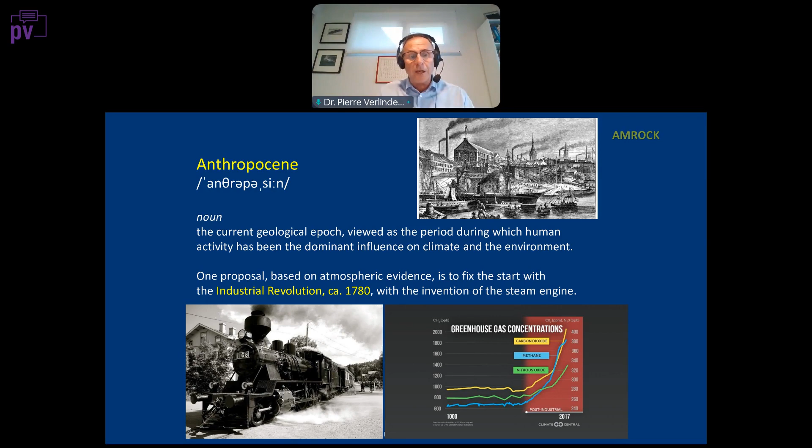And let's put things in context. Right now, we are in the geological epoch that we call the Anthropocene. It means that it's a period during which human activity has been dominant in influencing climate and the environment. People put the beginning of the Anthropocene at the beginning of the Industrial Revolution, around 1780, when the steam engine was invented. Of course, this is just an idea. It's not been officially recognized, it's not an official name for the current epoch, but that's what we call it right now, because we realize that human beings have a strong influence on the climate.

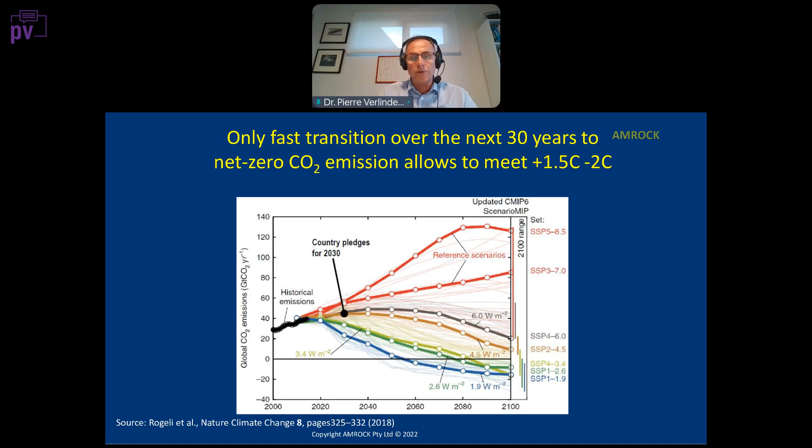So a lot of people have done simulations of what we should do and how fast we need to reduce CO2 emissions. And as you can see in those different simulations with different colors, only the blue one is capable of maintaining the temperature excursion to about 1.5 to 2 degrees C. That means that by roughly 2050 to 2055, we need to reduce to zero CO2 emissions. And after that, we need to remove CO2 from the atmosphere. So it's a big task.

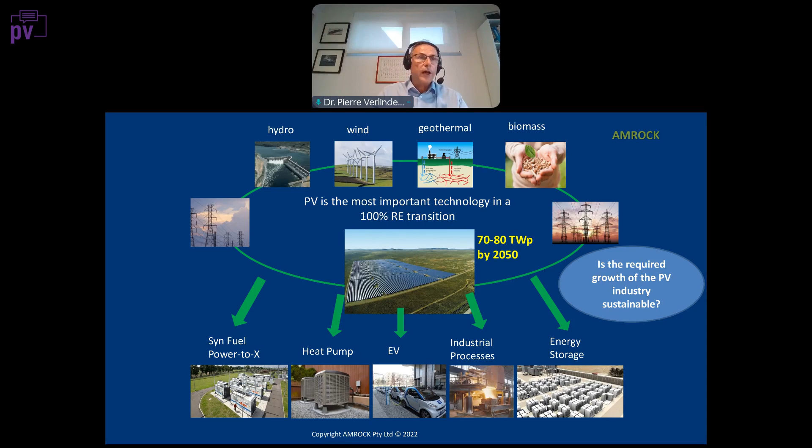So our vision is that the world needs to be 100% renewable, and PV plays a very, very important role. It's probably the largest source of electricity in the future. And to do this, we need to install something like 70 or 80 terawatts by 2050. Of course, with wind, hydro, geothermal, biomass, all of that being linked and interconnected, we will power the entire economy, including industry, transportation, heating and cooling of buildings, and generation of synthetic fuels to power the rest of the economy, including industry that requires hydrogen, for example, to make steel or aluminum.

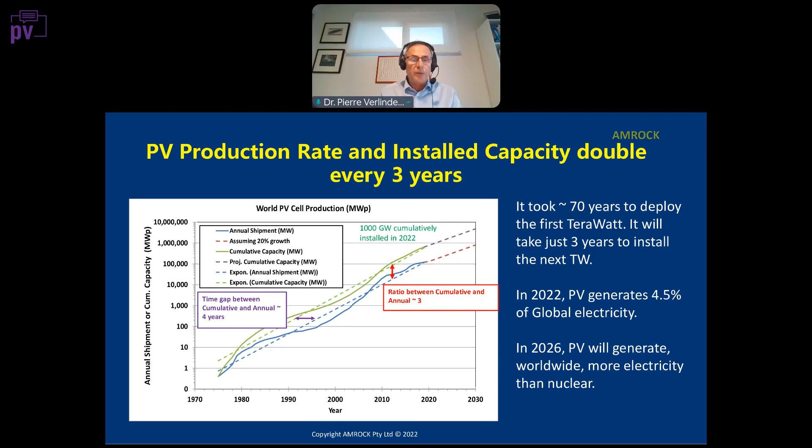Now, if we look at the PV production rate and installed capacity over the last 70 years, what we see is that the capacity and production rate have doubled every 3 years. It took 70 years to deploy the first terawatt, and it will just take 3 years to install the next one. In 2022, PV generates about 4.5% of global electricity. In 2026, PV will generate worldwide more electricity than nuclear energy.

And then we need to stabilize production at roughly 3 to 3.5 terawatts annually. This will allow the cumulative deployment to grow to about 70 or 80 terawatts by mid-century without creating a downturn, because at some point, of course, the deployment will saturate and the industry will start replacing modules that were installed 25 or 30 years previously. So we need to stabilize production about 25 to 30 years before it saturates, so before mid-century.

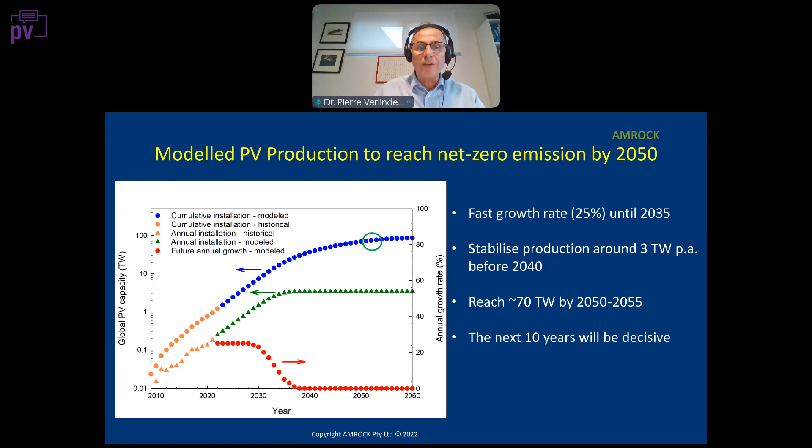So when we talk about sustainability, there are different ways to look at it. First, we could look at energy: how many kilowatt hours are consumed per kilowatt peak installed, including manufacturing, transportation, and installation. What's the energy payback time? How fast can we grow this industry to make sure we don't consume more energy than we generate?

We could also look at CO2 emissions. What's the amount of CO2 embedded in the modules and how much is it per kilowatt hour? We could look at water and chemical consumption, and also at solid waste, gas and liquid effluents, the pollution we create.

We could look at material usage. Are they available? What's the scarcity of this material? Is there a risk of price increase, speculation? How is the supply chain? Do we need to recycle or capture valuable material? And also, what is the financial sustainability of the industry? Can we generate enough earning to grow, to build a new production line?

There are different factors that will impact sustainability. Reliability, of course. If the module lasts 1 year, we need to produce a lot more modules than if they last 30 years. So it's very important that we increase the lifetime of modules and PV systems in general. Efficiency, performance ratio, annual irradiance, orientation, partial shading—all of those factors impact the amount of kilowatt hours per kilowatt installed.

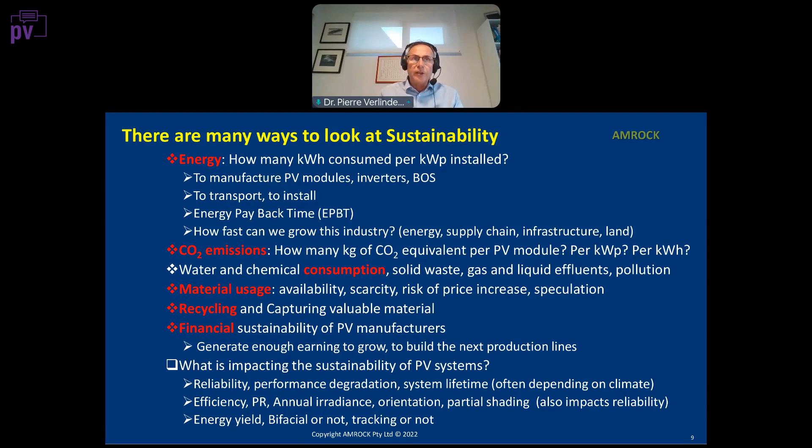And of course that impacts the sustainability of the industry. Energy yield—do we use bifacial modules or not? Do we use tracking or no tracking? All of that will impact the energy yield and the sustainability.

After 25, 30 years, hopefully maybe 40 or 50 years in the future, the system is decommissioned and recycled. Each of those steps requires materials and energy and will create effluents. At some point, recycling will generate material that could be sent back into the chain.

So what's the energy payback time? Well, it's the total amount of energy, of primary energy demand during the whole lifetime cycle, divided by the energy generated by the system, minus the energy consumed by operation and maintenance.

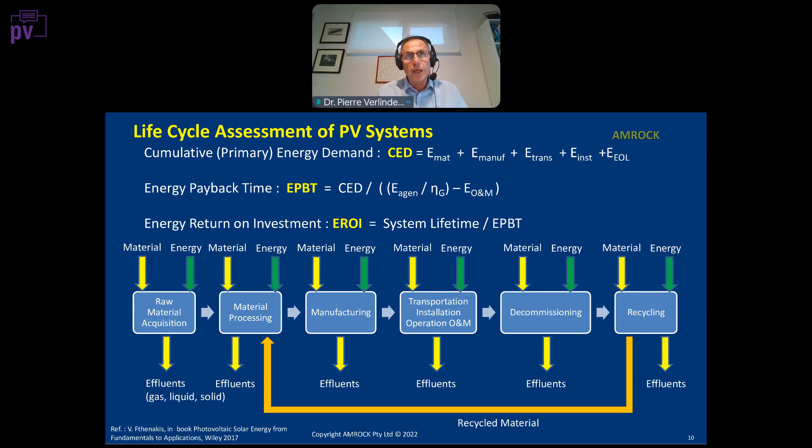You could compare that with other methods of generating electricity—for example, coal, which has more than 1,000 grams per kilowatt hour, or gas, which has roughly about 760 grams of CO2 per kilowatt hour, or nuclear, which has roughly about 24 grams of CO2 per kilowatt hour.

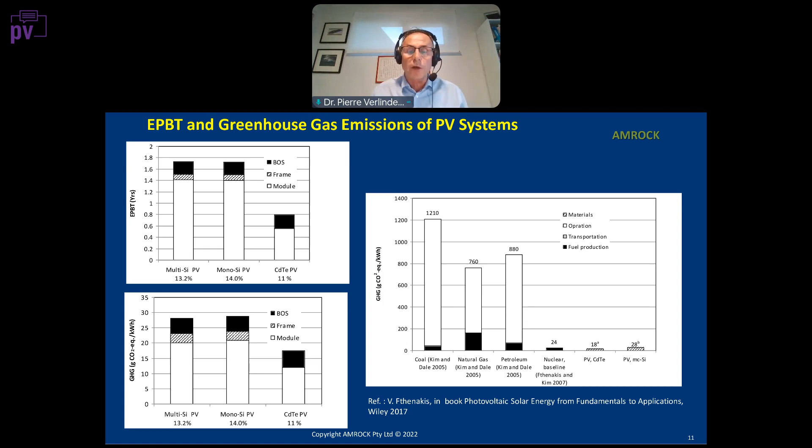You see renewable energy is growing because we're improving the lifetime, the reliability, and reducing the energy consumed to produce it. Whereas other technologies like oil, the return on investment is reduced because as we deplete the resource, it's more difficult to get the next barrel.

We have to spend more and more energy to extract oil. Now, how fast can we grow? Basically, the maximum growth rate is smaller than 1 over the energy payback time. So if it takes 1 year to pay back the energy consumed, you could grow at 100%. If it takes 2 years, you could grow at 50%. If it takes 3 years, you could grow at 30%. So the energy payback time is important to decide how fast we can grow the industry sustainably.

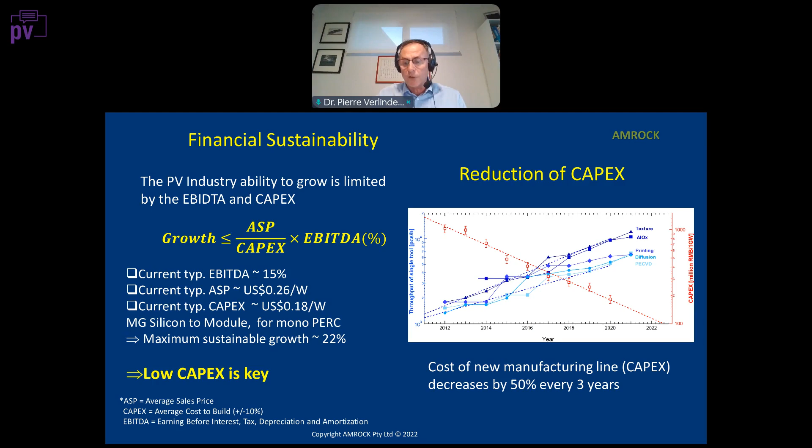So when we buy a 400 watt PV panel that costs about $100, it will produce exactly the same amount of electricity as 6.9 tons of coal, which costs about $280 US. That directly shows the potential sustainability of the PV industry.

This is represented by the graph on the left, showing that 1 terawatt of PV system consumes about 3 times 10 to the 17 joules in primary energy demand. It will generate about 698 million tons of CO2, but in the same time it will save 25 billion tons of CO2, save 3.9 times 10 to the 20 joules in primary energy, and generate 32,500 terawatt hours over 25 years.

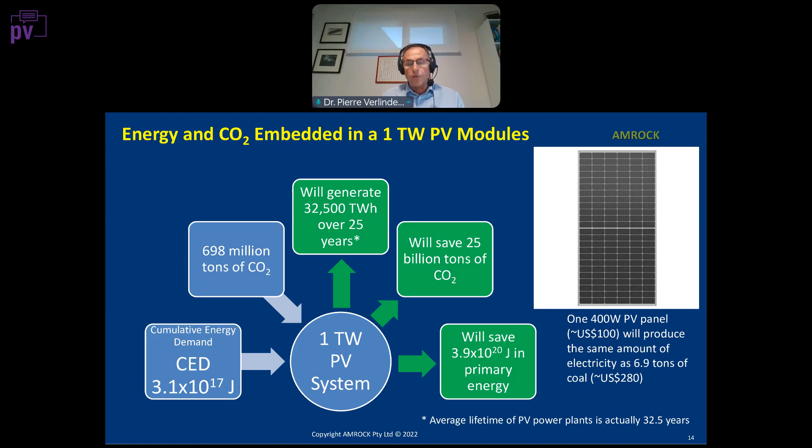So to give you an idea: yes, we do consume energy, yes, we do generate CO2, but we save a lot of CO2 and a lot of primary energy by operating PV panels and PV systems.

Now let's talk about material sustainability. On the right side of the slide, you see a graph of the cost of manufacturing versus cumulative production. It's pretty much a straight line in that logarithmic plot, representing what you've probably heard called the learning rate. The learning rate of silicon is roughly about 24%.

Now you see a bump there, roughly around 2010, when cumulative production was about 10 to the 4 megawatts. That bump is due to supply constraints—at that moment we were constrained in the supply of purified polysilicon, and that lasted a few years. So bumps on the learning curves are usually generated by supply constraints.

Supply constraints could be due to the inability of suppliers to grow as fast as the demand, as fast as the industry. For example, in 2005-2010, the polysilicon industry could not supply purified polysilicon as fast as the PV industry was growing. Recently we've also seen interruptions of supply due to fires and flooding—several polysilicon factories had fires, some flooding in China that interrupted the industry. We also had COVID, which prevented supply from reaching manufacturers. But those supply constraints that I mentioned are temporary.

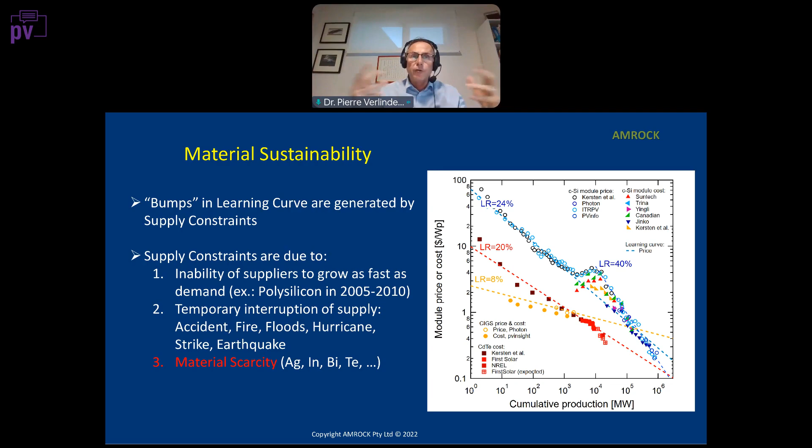They will be solved at some point. However, number 3, material scarcity is another problem. For example, materials like silver, indium, bismuth, tellurium, cadmium, etc., materials that are pretty rare compared to silicon, and we have to make sure that we have enough of those materials in the future when we reach the terawatt or multi-terawatt level.

The graph on the left side shows the materials that we should not use in photovoltaics. The ones below the blue line are 7 orders of magnitude less abundant compared to silicon, and those materials we should not use because at some point as we grow, they will not be available anymore. Those materials are silver, indium, palladium, gold, platinum, and also bismuth, cadmium, and tellurium. We should not use those materials.

This graph on the right-hand side, I showed in 2013 at the EU PV-SEC in Paris, showing a simulation of the impact of the PV industry. That's the blue line that becomes dominant about 2020. By 2020, we see that PV is actually growing the demand for silver. It's the fastest growing demand and usage for silver in the industry. The world production of silver is about 30,000 tons per year.

You'd say we could recycle, of course, but recycling does not become significant until 2050. If we recycle today, we recycle modules that have been installed 25 or 30 years ago, and the quantity of those modules is not sufficient to supply silver for the industry.

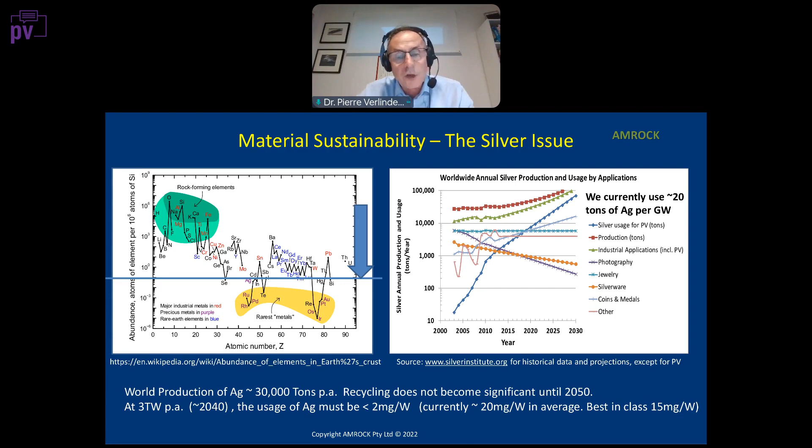So where is the silver? Well, the silver is, of course, in the contact, and we have different technologies to consider. PERC is the one that uses the least amount of silver. It uses silver on the front side to contact the N-type region. The back side uses aluminum for contacting, and there's a little bit of silver for the bonding pads.

The TOPCon technology uses an aluminum silver contact on the front and a pure silver contact at the back. So we have to expect TOPCon to use a lot more silver than PERC. Silicon heterojunction cells use silver contact on both sides, so again, they use more silver than TOPCon and more silver than PERC.

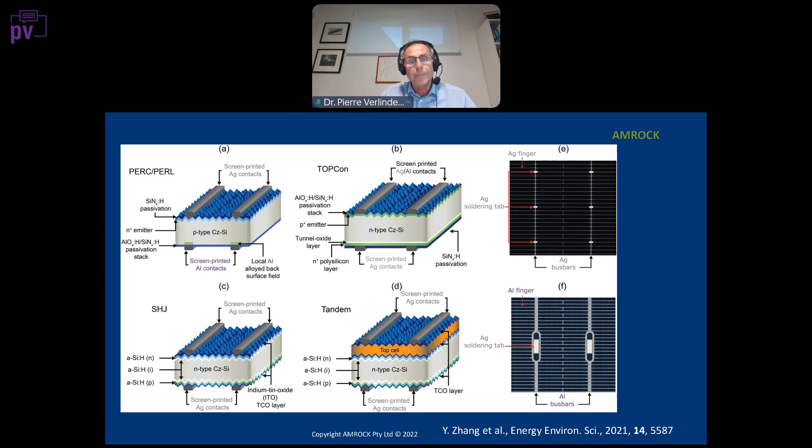And for future tandem cells, like perovskite on silicon, they also use pure silver contact on the front and the back. So on the table on the left-hand side, you see the consumption of silver for the different technologies. Best in class uses roughly about 15 milligrams per watt in PERC technology, for TOPCon about 25, and for heterojunction about 34 milligrams per watt.

At 1 terawatt production level, PERC technology would use 53% of the current global production of silver. TOPCon will use 88%, and HJT would use more than 100% of all the production of silver. So at 1 terawatt level per year, we need to reduce to 5 milligrams per watt; at 2 or 3 terawatt, we need to reduce to less than 2 milligrams per watt.

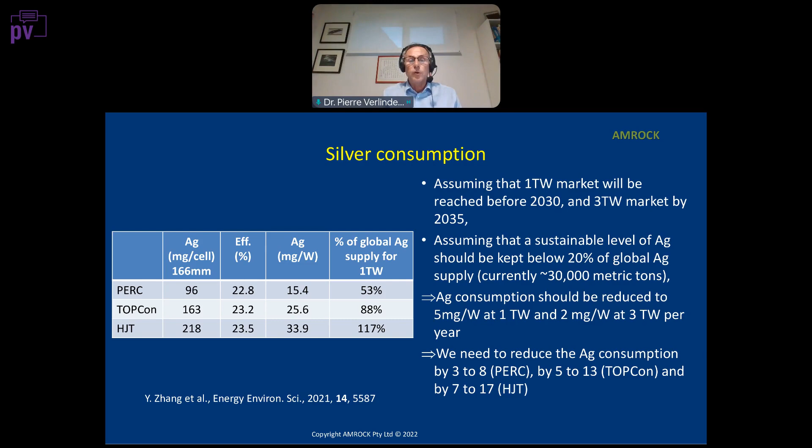Now, indium and bismuth are both used in heterojunction technology. Indium is used in the cells for the deposition of TCO, transparent conductive oxide, in a layer of indium tin oxide. Heterojunction uses roughly about 4 to 10 milligrams per watt of indium. So if we want to keep the consumption of indium less than 20% of the world supply, that means we cannot grow heterojunction to more than 37 or 95, less than 100 gigawatts.

So for the moment, we cannot grow heterojunction technology to more than 100 gigawatts per year.

Bismuth is used in the soldering of the contact, the ribbon and the wires to the cell, during module assembly. This is because we need low temperature solder, so we use a tin bismuth alloy. If we use a 12 bus bar technology, we use typically 7.8 milligrams per watt. If we use smart wire technology, we use 13 milligrams per watt.

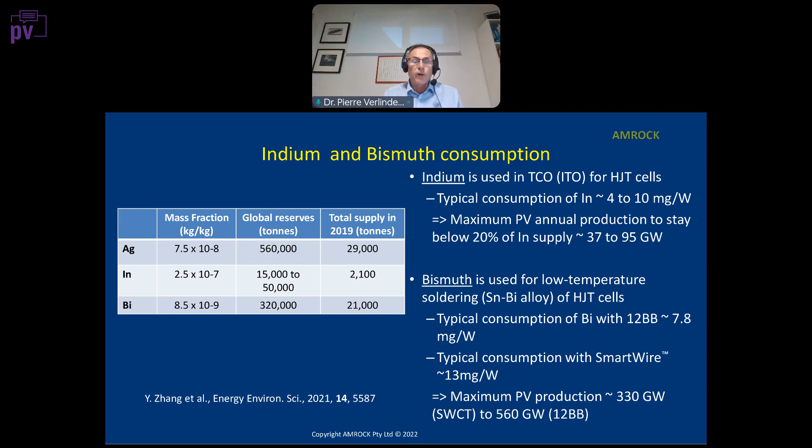So the maximum production in those technologies using bismuth, if we want to stay below 20% of the overall production of bismuth, means that we cannot grow this technology more than 560 gigawatts in the case of 12 bus bar, or 330 gigawatts in the case of smart wire technology.

So we use quite a bit of material, and the most important one right now is for PERC technology. If we suppose PERC at 1 terawatt level, we would use almost 90% of the worldwide production, so 29,000 tons of silver. Of course, there are other materials, like copper.

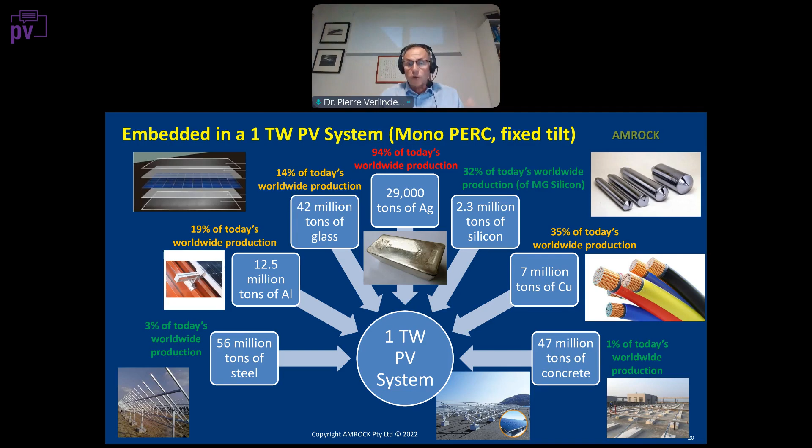Now let's talk about recycling. Of course we need recycling. Today we have roughly about 100 megawatts of modules to recycle. In 10 years, the volume will be about 10 times larger, about 150,000 tons of modules to recycle.

When the system is decommissioned, we remove the concrete, we recycle the metals, the steel, the aluminum frame, we recycle the cables, the connectors, etc. The modules are partially disassembled, so we remove the frame, the cables, the J-box, etc. We can remove the back sheet also. So those are easy to recycle.

After that, it becomes a little bit more complicated. You could crush the modules and sort the particles to recuperate glass and metals and the different components, or you could use a chemical process or a thermal process, or a combination of all of those.

Today we need to recognize that recycling technology is not developed enough. We don't recycle silver. We don't recycle those important metals that we need to recycle. And why don't we do it? It's because the technology to do it is too expensive. So we need to develop a good recycling technology that is effective and cost-effective to recycle the material that will be the most scarce in the process, like silver, for example, and also bismuth or indium if possible.

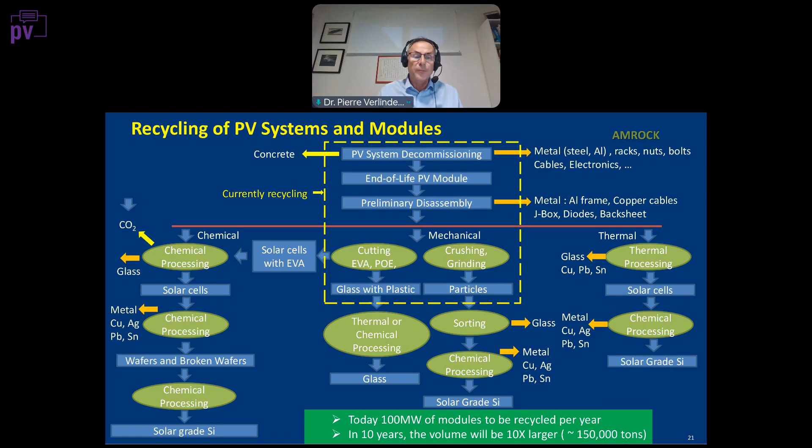So we arrive at the conclusion of my presentation, and I hope you find this quite interesting. PV manufacturing will continue to ramp up, and we need to keep growing at more than 25% per year to reach about 3.5 terawatts by 2035, and then stabilize to reach a cumulative capacity that could reach about 70 terawatts by 2050.

There is no issue with the energy payback time and the energy return on investment. We are fine with that. We keep reducing energy and water consumption, as Adele will show you, and we keep reducing our emissions.

However, financially we have to be careful that we cannot grow faster than what is limited by the capex and EBITDA. Right now, fortunately, capex is decreasing by about 50% every 3 years, which is good. But the sales price also is reduced by about the same amount, and the EBITDA of the industry is not very high. It's in the range of 10 to 15%.

We have temporary supply constraints, and we have seen that in the past with polysilicon, with glass, with wafers, etc. But those are temporary issues, not fundamental issues. It's just the supply chain having difficulty growing as fast as the demand.

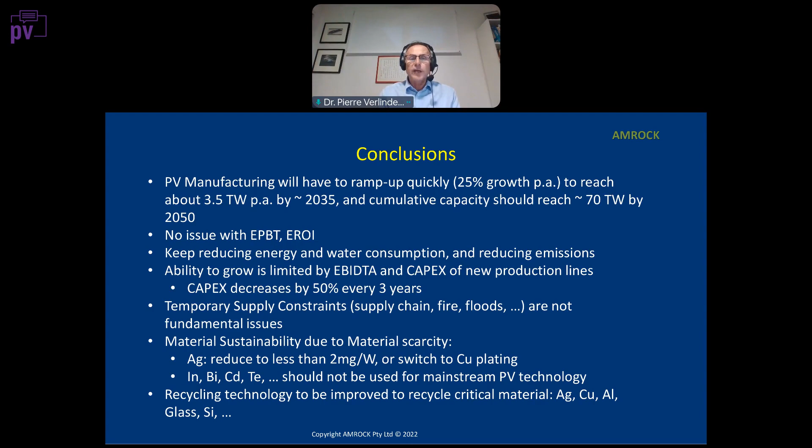Okay, so thank you very much for your attention. I'll be happy to answer your questions.

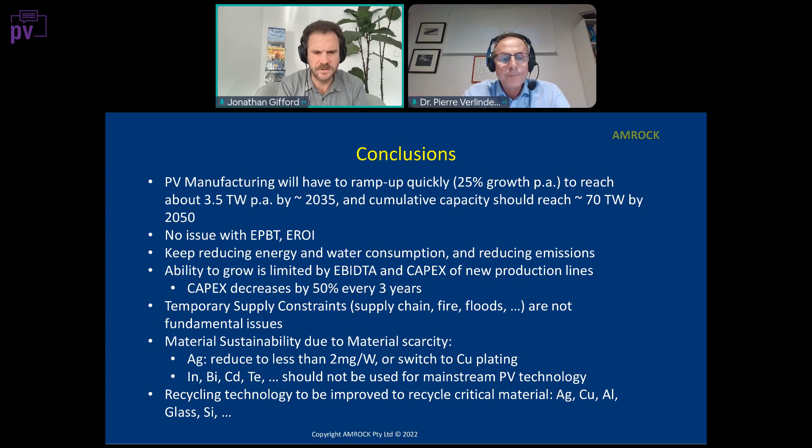A couple of questions have come in regarding the energy payback time. I think that's slide 11 of your presentation, or slide 13 of our joint presentation. The numbers that you showed were from 2017, the most recent study, and I think it was multicrystalline technology that was modeled there.

I'll go back in the presentation. Is there any update to that? And what kind of impact do you think this switch to monocrystalline, and also things like thinner wafers, is having on the energy payback time for solar?

Well, not so much the thinner wafers, but mostly the diameter of the diamond wire. This has been critical to improve the energy payback time. I remember about 2004 when I did a study to see how many tons of silicon we need per megawatt. We needed about 14 tons of silicon per megawatt, and now we're down to about 4 tons per megawatt. This is mostly due to the fact that the diameter of the wire to saw the wafers has been reduced from 200 microns to right now less than 50 microns.

And that's been a huge impact, because we need to realize that the purification and crystallization of silicon are the most energy demanding steps in the fabrication of the wafers. So if we could reduce the kerf loss when we saw the wafers from 200 microns to 50 microns, that is a huge improvement in the energy payback time.

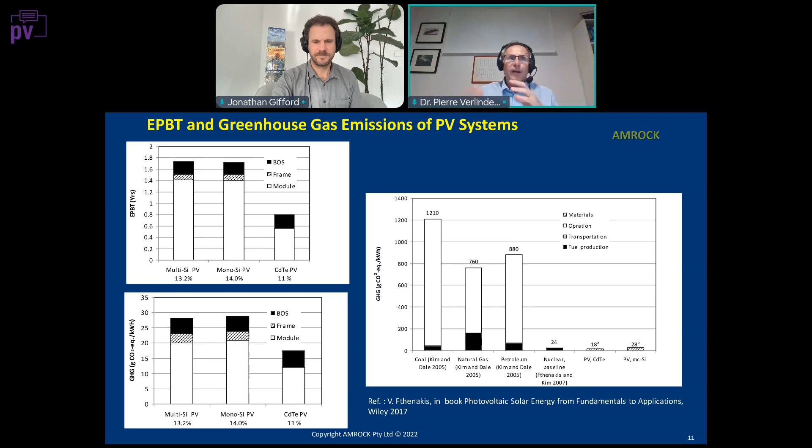However, we have to say this is calculated for good irradiation, a good solar resource, for a panel that is very well placed with no shading, etc. If you put the same panels on a building and it's partially shaded in a city with other buildings, you don't get that energy payback time.

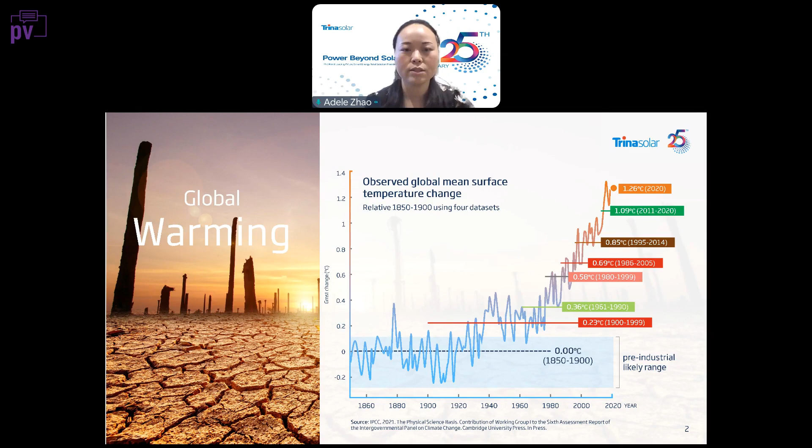In Europe, where I am at the moment, we see a strong demand, for example, also on the residential segment this year, a clear sign that society itself is moving. Everyone around us feels the urgency, wants to do the energy transition, which is great, besides the industry itself and also the government policy.

So why Trina exists, and this is why: everything we do is because we want to produce solar energy for all. We know we need much more renewable energy, we need to electrify the world. And for Trina as a company, our mission is to produce solar energy which is affordable and sustainable for everyone in the world. So this is essential.

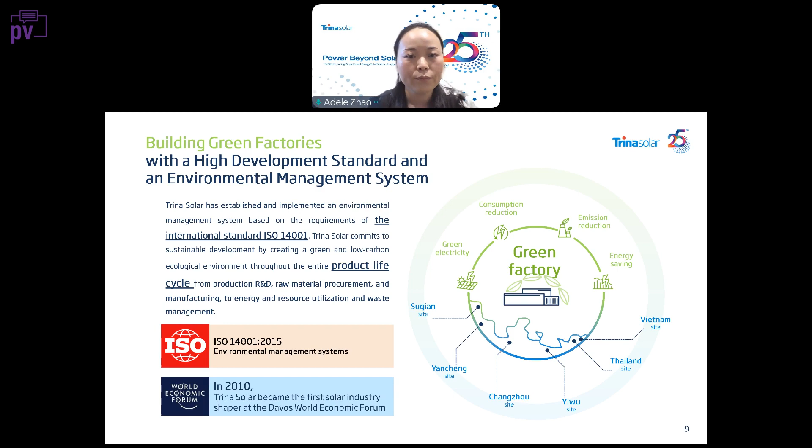And here, I think it's not just Trina alone. As a solar company, so we actually, on the downside, we do use a lot of energy. We have a lot of emission, which we try to push down. But on the other side, our product produces clean energy for the whole society.

So in the future, the goal is we push down the emission and we produce more clean energy for the whole society. So here's a number just to show you, in the past 6 years, what our emission is, and on the other side, how much clean energy we actually produce. You can see the number is already very exciting. We are actually negative. But on the other hand, we know we have to help the society, another industry, to decarbonize. So this will be the essential goal we want to achieve in the next years.

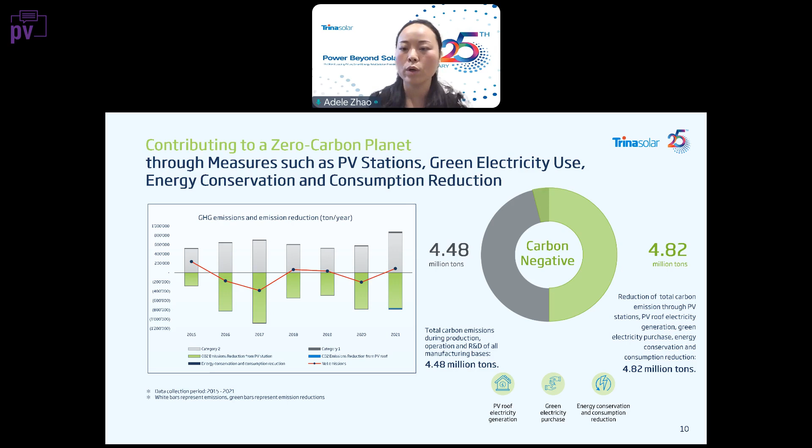In the last years already passed, we have already delivered over 100 gigawatt modules to the whole world. Our products have produced 135 billion kilowatt hours. That's very impressive. That's equivalent to 4.43 Three Gorges hydropower stations, the biggest hydropower station in China. So that's 4.4 of it. That's really impressive.

I'm pretty sure the whole industry has to work more together to push more solar into the whole world. We are also committed, we are part of the science-based target to hit 1.5 degrees. This is a goal we have together, and we're going to continue to push down emissions ourselves and also for the whole world.

Now I'm going to move to society. As a company, emissions have to be lower. Another side is society - it's the community we live in, we work in. It's our own employees, also our supply chain, and also our customers. We have to maintain a very healthy society, healthy industry. The people inside are essential, so we have to be happy working in the industry.

How we manage our supply chain in particular - we make sure we have full transparency and we audit our suppliers frequently. We're also building an IT system for traceability in the supply chain. One important thing: we only choose suppliers who are open and willing to work with Trina according to our standards, so they can follow us on transparency and traceability. This is the basic criteria we use to choose suppliers.

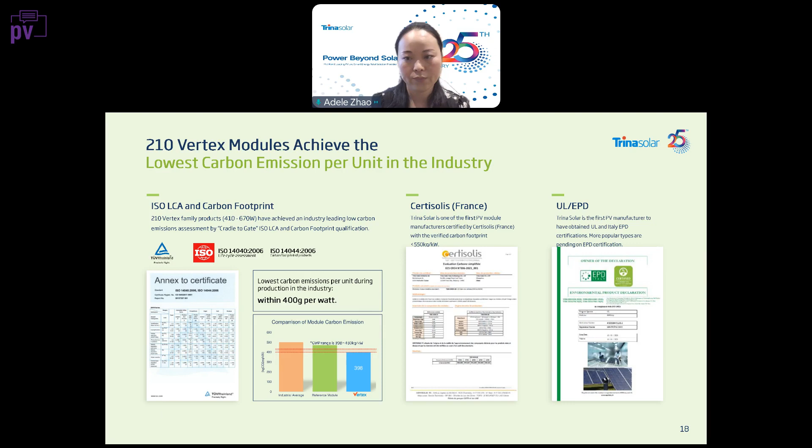This is probably not new to most of the audience here: Trina is always at the top of the bankability rating in Bloomberg NEF every year, for the last 7 years. We're always 100% bankable, which is very essential for our clients.

Lastly, let me quickly show you what we offer. Today, the majority of our technology, almost 100% this year, Trina has transferred to 210-based technology, which also helps reduce energy consumption in the ingot and wafer process, as Pierre mentioned, because of the larger wafer. This makes the product more sustainable. Trina has transferred all our capacity, including new capacity, to the 210 base.

These are Vertex products. We also introduce a new Vertex N series, which is a TopCon product, as we work to reduce material consumption like silver. This is something we're working on, and this product will already be ready in Q1 for mass production.